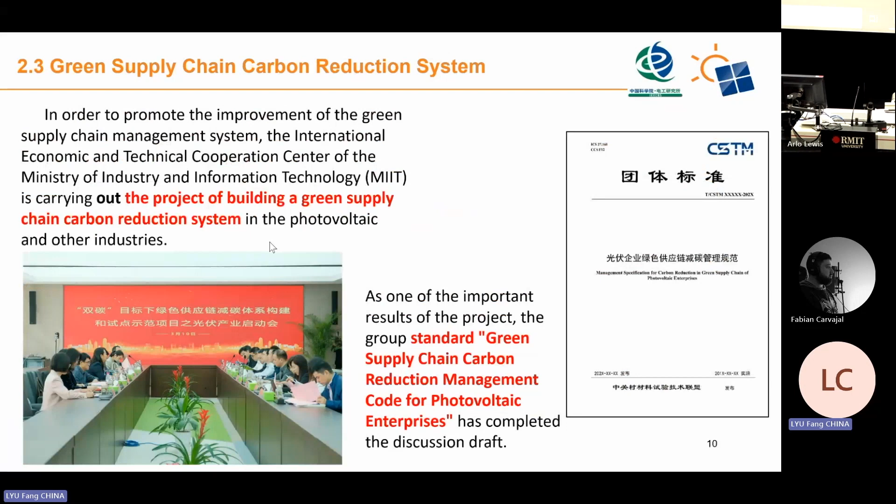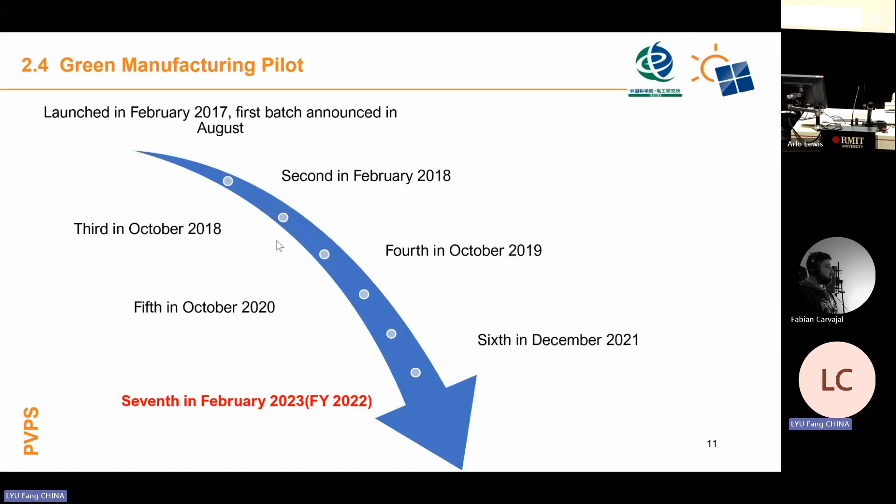The Ministry of Industry and Information Technology launched the Green Manufacture Pilot Programs, a national level pilot program starting in 2017. Until now, it's been 7 years, and each year we have green factory, green production, and green supply chain pilot projects. We also have third-party organizations, such as my own, sponsored by the Ministry of Industry and Information Technology of China. We have the China Green Supply Chain Alliance to push the PV industry from light green to deep green.

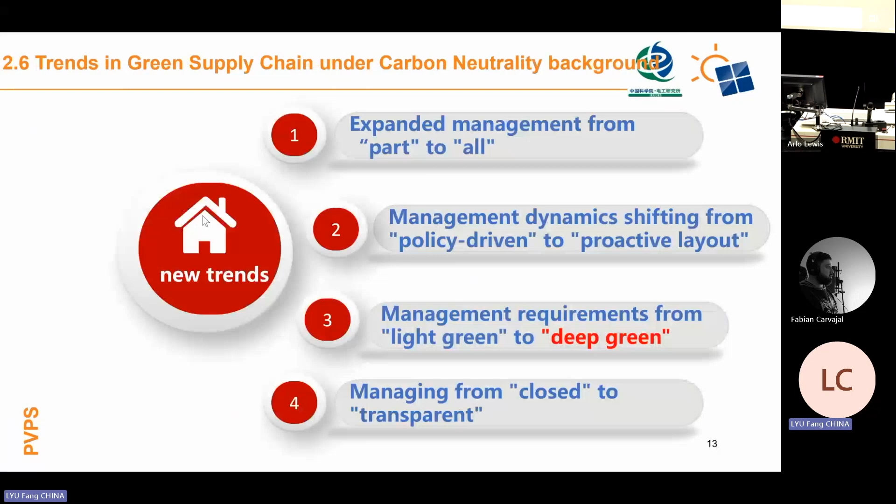Such is the case about LONGi. At the very beginning of 2020, LONGi became the first company in China to announce and release a supply chain green partner empowerment program. This means they encouraged upstream and downstream suppliers together - now more than 150 companies - to promote energy saving and emission reduction actions among supply partners.

Okay, so we go to the third part about PV recycling and circular economy in China. First, I want to show that in this field, China used to use the IEA forecasting about the China end-of-life PV market, and this data is, I think, six years old. This year we did new research about the domestic end-of-life PV market forecasting at my center.

First we collected the existing installed PV data from the year 2000 - that's 23 years ago - to now, and also did forecasting from now to 2050 for future installed data. Then we established models with lifetime distribution, Weibull distribution, and market supply models. Then we got the final results, which I'll show you later.

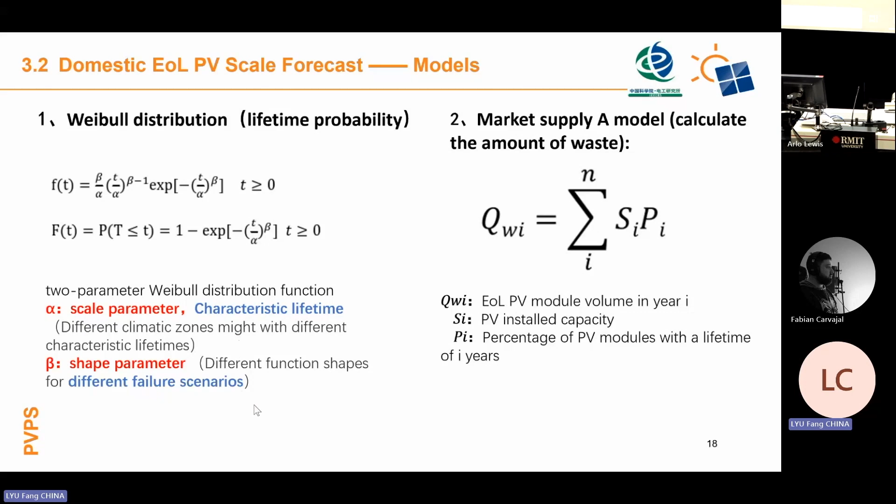In this research we have two important models: the Weibull distribution model and the market supply A model. The Weibull model describes module lifetime probability distribution and contains two important parameters. One is the scale parameter, alpha, which indicates the average module lifetime. The other is the shape parameter, beta, used to describe different failure scenarios. The market supply A model is used to calculate the amount of waste.

This research has a very interesting aspect - we consider climate zones. This project considered the important impact of different climate zones on module life, because according to the national standard for classification of environmental conditions, especially temperature and humidity, China is divided into 7 climate zones, such as the frigid temperate zone, humid tropic zone, hot dry zone, and so on. By studying typical research results of PV module degradation in these climate zones, this project obtained the distribution function of module life with content for different climate zones.

So we collected 3 typical lifetime distributions: one is a frigid high-altitude zone, such as Western China - Tibet, Qinghai - where altitude is more than 4,000 meters. Another is a humid tropic zone, and the third is a temperate zone. So the Weibull distribution model was developed with 2 scenarios: regular loss and earlier loss. Let's see the results.

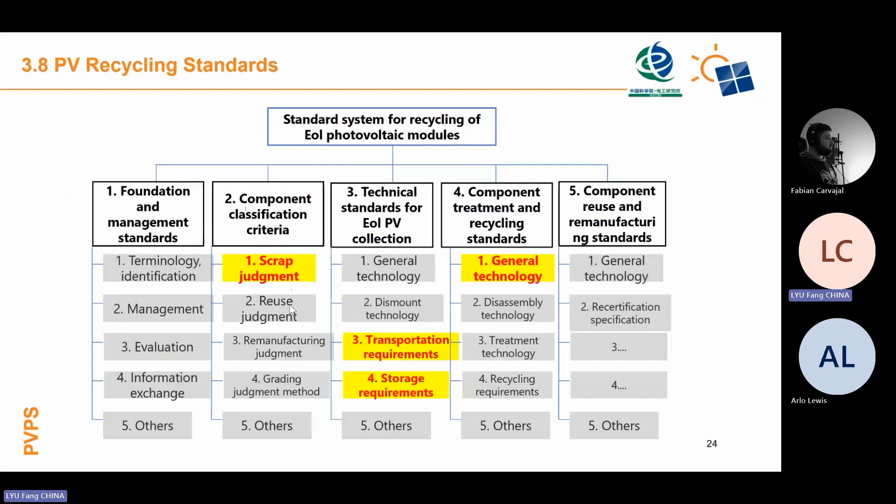So now we can see the 4 yellow ones already published, and we still have many standards just on the way, on the road. That means we still have a long way to go to complete and promote this.

I've introduced different technical methods about the PV recycle demonstration line in China. The first one is the mechanical method, accomplished in North China in Baoding city, from the Yingli company. First it removes the frame, then a hot knife - the important facility - separates the glass and PV film, then it steps into breaking and sorting.

This line has a capacity of about 13 megawatts per year, and the energy cost reached about 24 kilowatt-hours per kilowatt. The total module mass recovery rate reached above 99%, and we can see some elemental recovery rates such as silver, silicon, and copper are always above 90%, some reaching 97%.

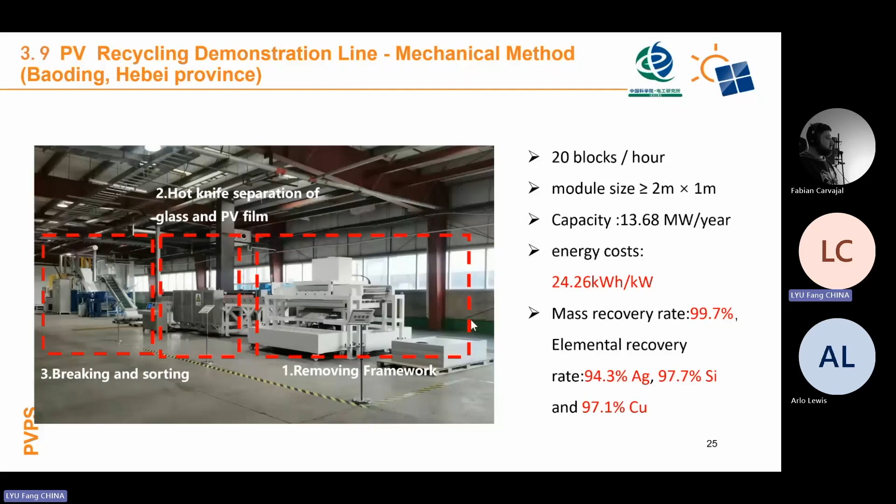Please note, this is a demonstration on demonstration lines only. When we step into the real marketing industries, the capacity is much larger than this demonstration line.

Another method is the thermal chemical method, sponsored by Jinko company in Eastern China. This thermochemical treatment rate is now less than 6 million pieces, energy consumption is less than 27 kilowatt-hours per kilowatt, and the mass recovery rate is much higher than 92%. Looking at elemental recovery, silver is above 95%, silicon is above 96%, and copper is about 98%.

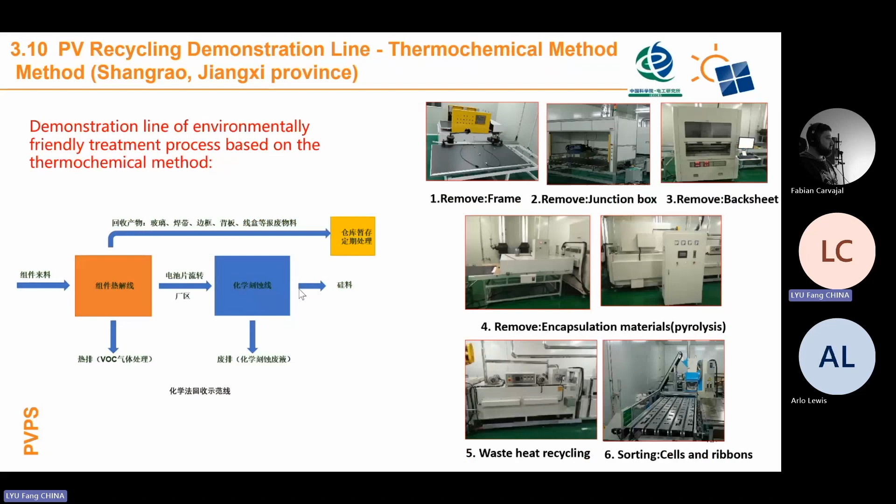After the two national R&D demonstration projects, more companies in China have already launched PV recycle R&D and demonstration production lines. I'll list some of them: not only Jinko and Yingli, but also big owners and system integrators, like the State Power Investment Corporation, which is the largest system integrator and owner, not only in China but I think in the world. Because of EPR considerations, they've also prepared technical methods for recycling.

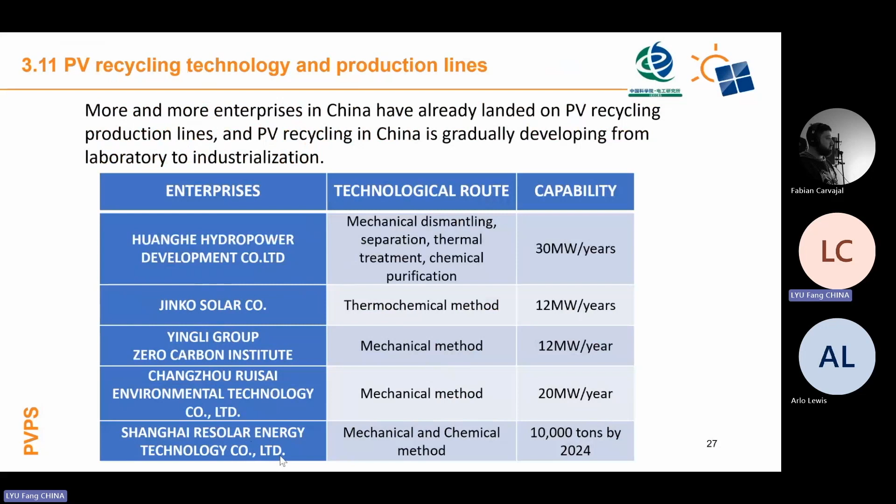There's also Changzhou Ruisai, a facility company focusing on the mechanical method, and Shanghai Resolar Energy Technology company. It's very interesting, I'll introduce it later.

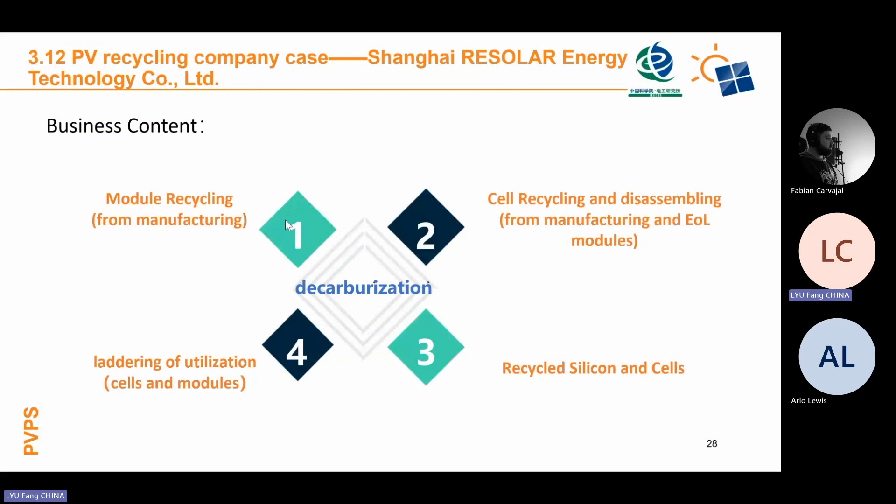Here's a case about a PV recycle company called Resolar. Let's look at the process first. They collect waste from the power station on one hand, and from the manufacturer on the other hand. After transportation, they use a chemical method first to separate the cell and the glass.

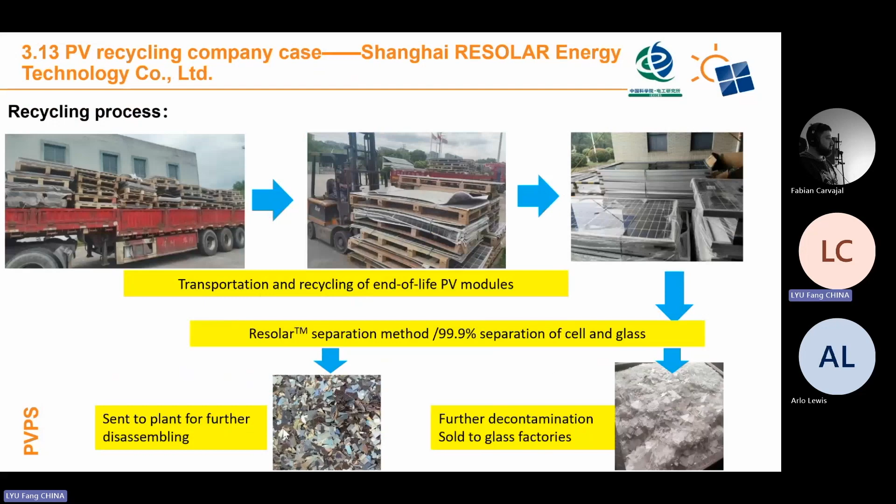With further treatment, the glass can be reused and sent back to the PV glass manufacturer. For the cell, you can see the silver is not yet removed, so they remove the silver, then get the silicon for purification. They get the ingot again, then the wafer, and from the recycled material they produce a new wafer, cell, and module.

For the wafer and cell, they also perform performance testing for reuse. This case shows that in China, our technology and companies are not only closing the loop on recycling, but stepping further into reuse and circular economics.

Now when we look at the price across the whole supply chain, sometimes silicon is very high priced, so you might think it's very valuable to do this. But now the silicon price has gone down sharply, so what's the other meaning of doing this kind of work? Yes, they do it, because this reduces effects not only by pushing down the lower cost of the whole system, but also because we can reduce or optimize the carbon footprint of the new modules.

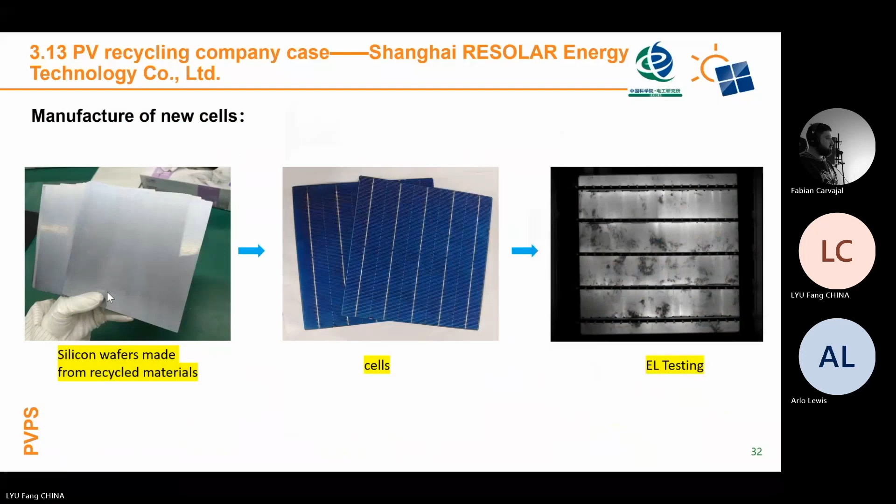Lastly, I'll introduce that in IEA PVPS, about 3 years ago, they published the DFR PV module guideline — design for recycling PV module guideline from the IEA International.

Now China's PV industry pays more attention to eco design. In recent years, our center has organized a big team from cell, glass, module, frame, backsheet, and silicon, plus packaging and transportation companies, to prepare new research on the China design for recycling DFR PV modules guideline, which will be released, I think, at the beginning of next year, 2024.

Our center has already published a white paper about China PV recycle and circular economics last year, and we prepare and publish a white paper every year. If you're interested, we can share more information online on our website about end of life treatment, recycling, and reuse in China.